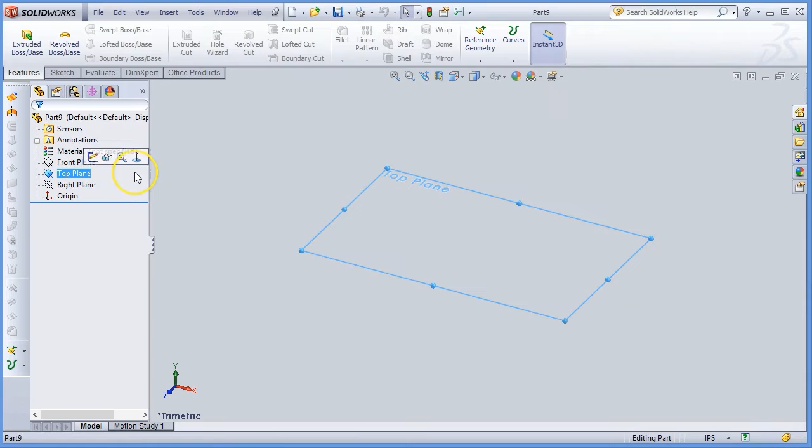This tutorial is going to look at Extruded Cut, which is an additional manipulation you can do to a face or surface on a 3D object. So we'll start with a new part. Select a plane. Select Sketch. We're going to draw a rectangle.

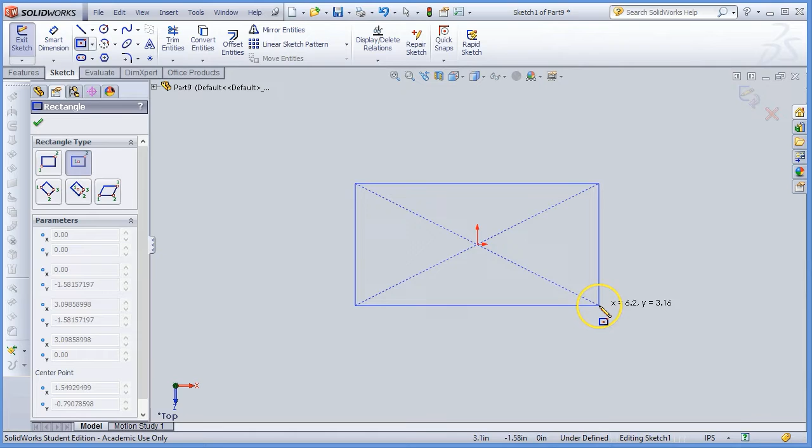We're going to use a center rectangle instead of the standard corner-to-corner rectangle. That way we can anchor it to the center locus of the drawing space. And you see you get that little hint. We're looking at about a 3x6. Again, don't stress about getting it exactly right while you're drawing it. Just get it roughly right, because then we can use smart dimensions to set the size exactly right.

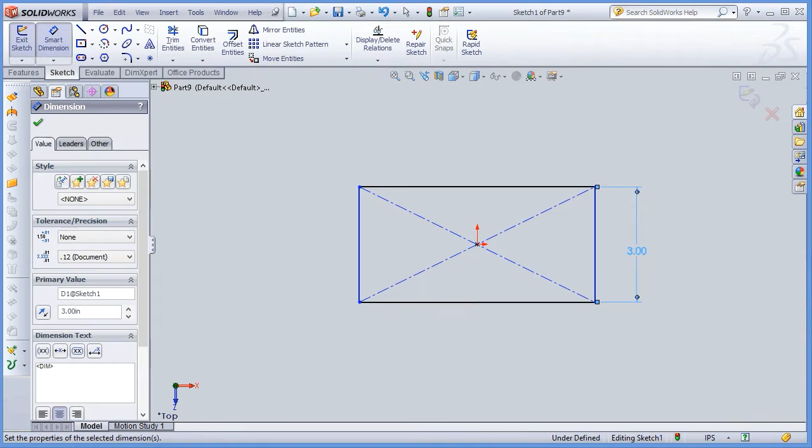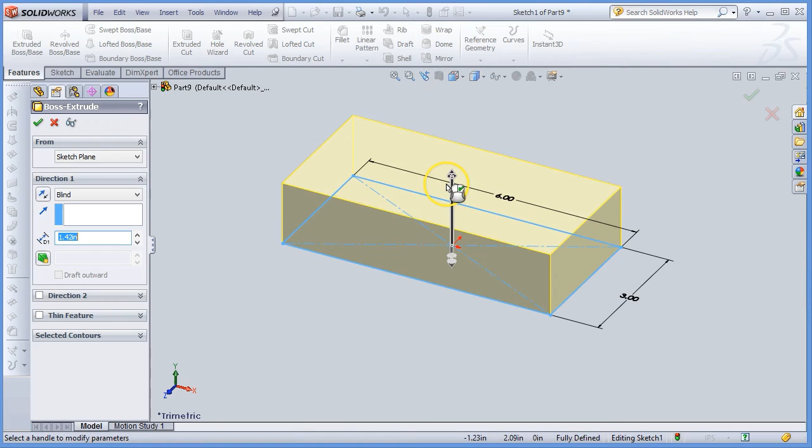Select those two lines, these two lines. Okay. We can accept that. Now we can select the sketch again. And then we'll go to Features and we'll do an extrusion. And we'll make that 1.5 inches. Accept that. And we're going to go to the top view.

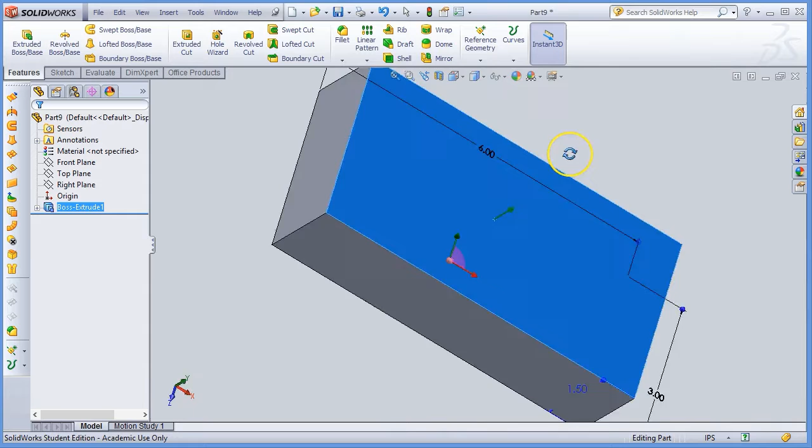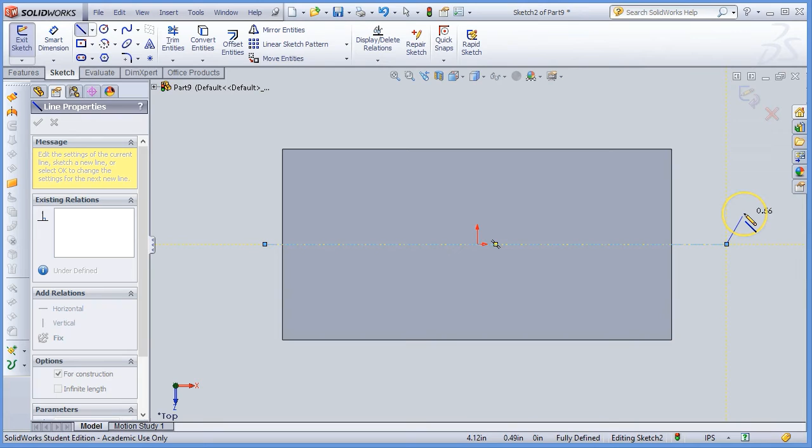We're going to select this face so you can see we've got a face. We're just selecting one face. It's highlighting blue. Let's reorient that. And now we're going to add a center line, which is just below line here. And we're going to just sort of key in right to the center point of the drawing. So we get the little hint. Now we're going to draw a center line across it. Make sure it's even. And to exit the center line, otherwise it'll just continue drawing a series of center lines, just hit escape.

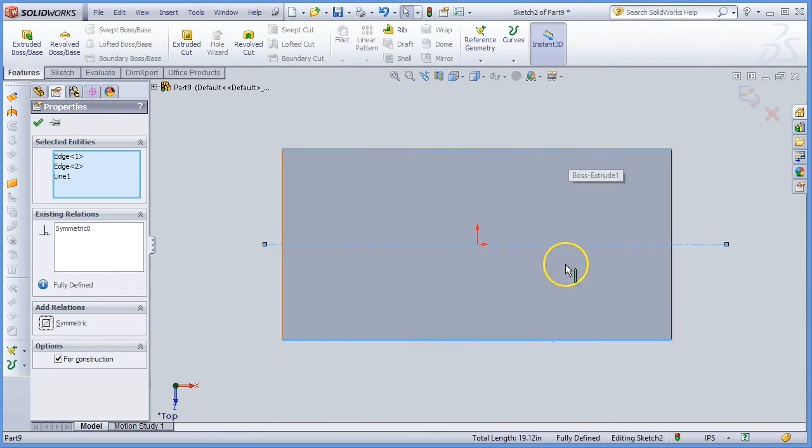Now we want to create some relations. So we're going to select these two edges and the center line. We're going to make this symmetric, so that way each of these lines is equal in space, and that ensures that this is locked in as a center line. Okay. Now we're going to go back to Sketch.

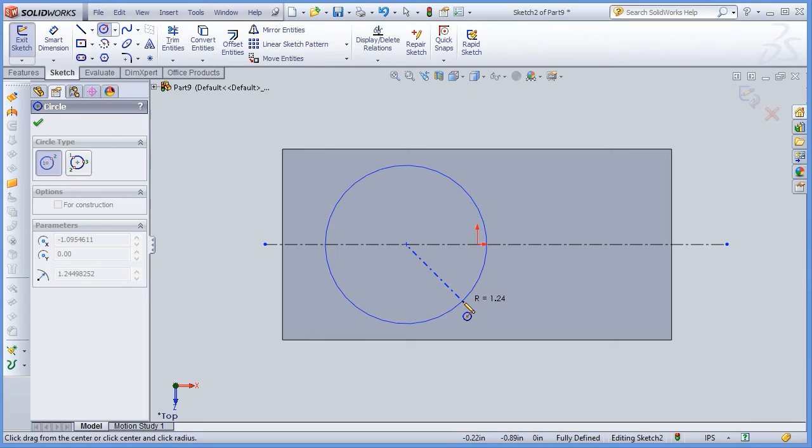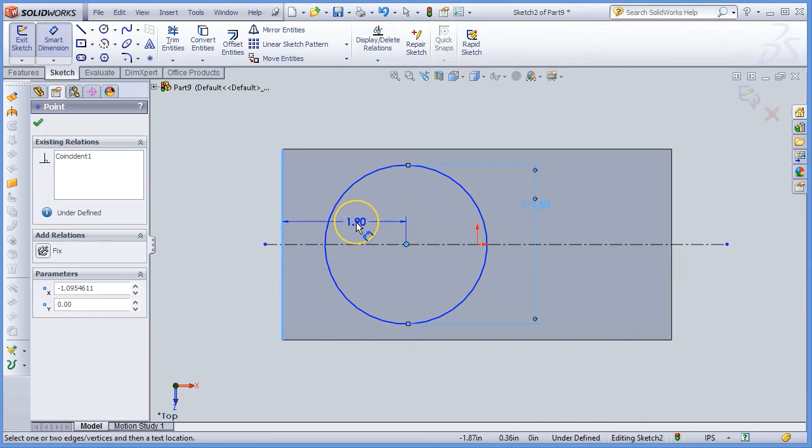Again, select this face. I'm going to draw a circle from the center. Again, we don't really care. We want to obviously center it on the center line, but we're less concerned about the exact location and size right now. So we're looking at about 1.25. Okay, but we'll use smart dimensions to actually set that up. So click here. So that's 2.5 diameter. And we also want to set the distance from the center to the edge. And we'll say 2. Okay. Accept that.

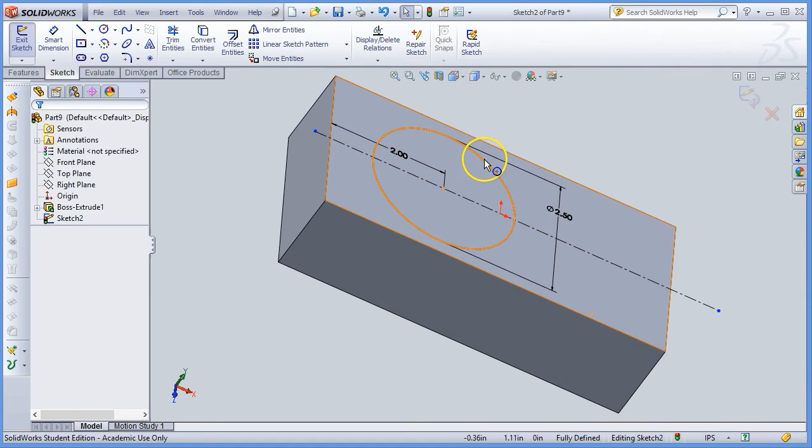So now you can see we've drawn a defined circle on this singular face. It's got all the dimensions you need. You can see it's got a black line, so that means it's defined. Now we're going to select that. We're going to do Feature. We're going to extrude that. We're going to extrude it up. Let's just say 1.25 inches. Click OK.

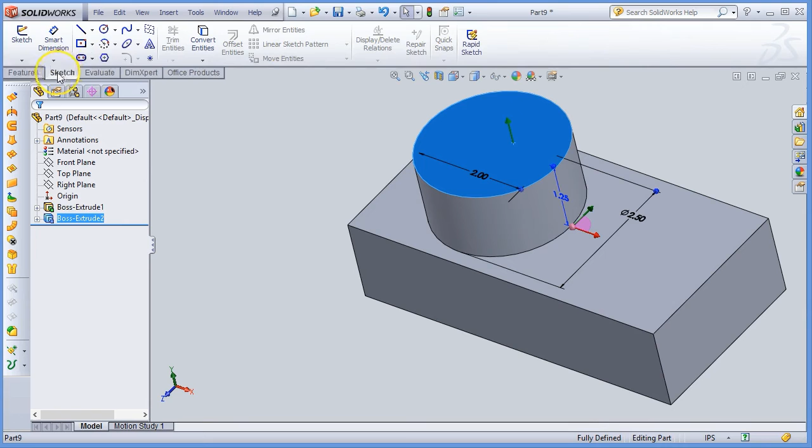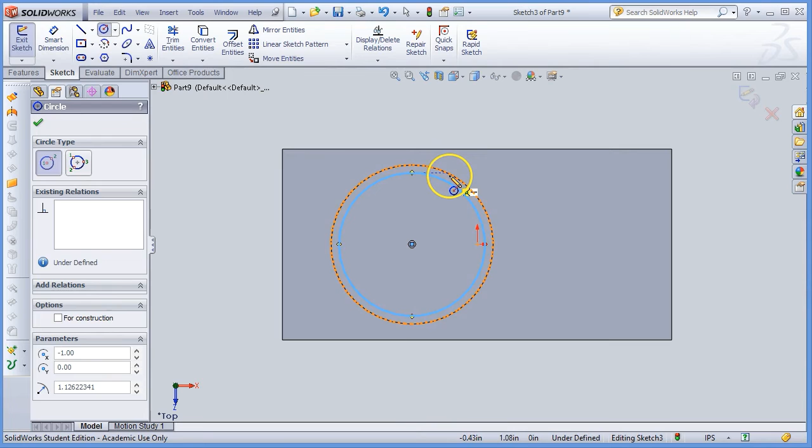Now we're going to select this circular face. We're going to go to Sketch. We're going to see if we can find the center of it. If we can't, we'll define it later with smart dimensions. So we'll go back to the top view. Now what we can do is select these two circles. Oops.

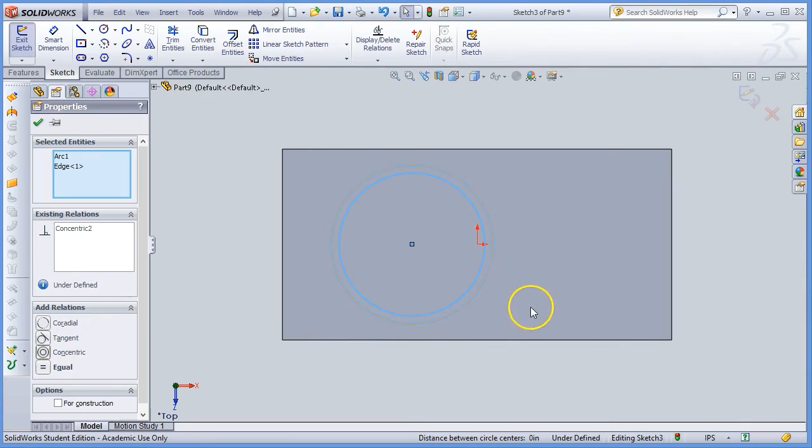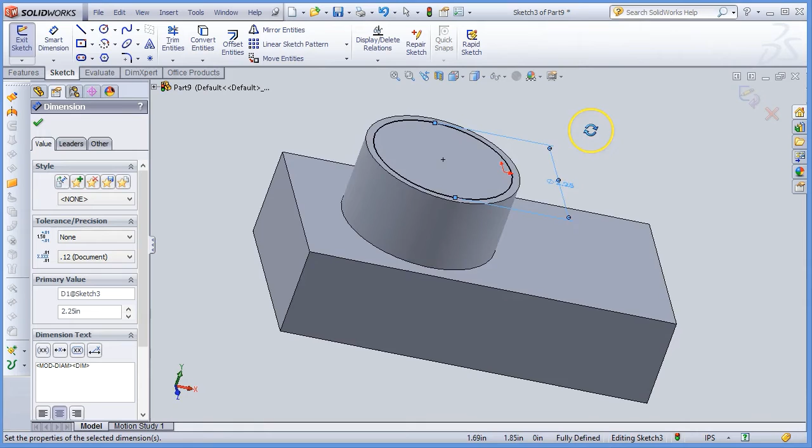Select this circle. Hold down Shift to select that circle. Create a relation, and you can see we've got a new relation we haven't seen before, which is concentric. And since the center of the outer circle is already defined, now the inner circle is equally defined. So then we'll use Smart Dimensions just to set the size of this. The first one is 2.5, so we'll say 2.25 for this one. Okay. Accept.

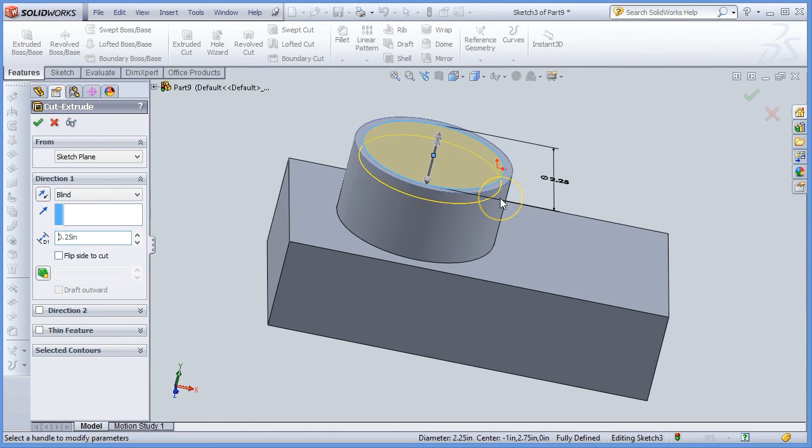And I'll select this circle. We'll go to Features, and instead of extruding it, we're going to do an extruded cut. And you can see that's going down into the shape. So we don't want this to be too deep. Right about there. So let's say 0.25 inches. And then accept. There you go.

So now you have two different basic 3D geometries built together. You're drawing on faces, so you're always selecting faces to sketch on top of, and then extrude or do an extruded cut into. This starts to build complexity into the form, and we'll continue on from here.